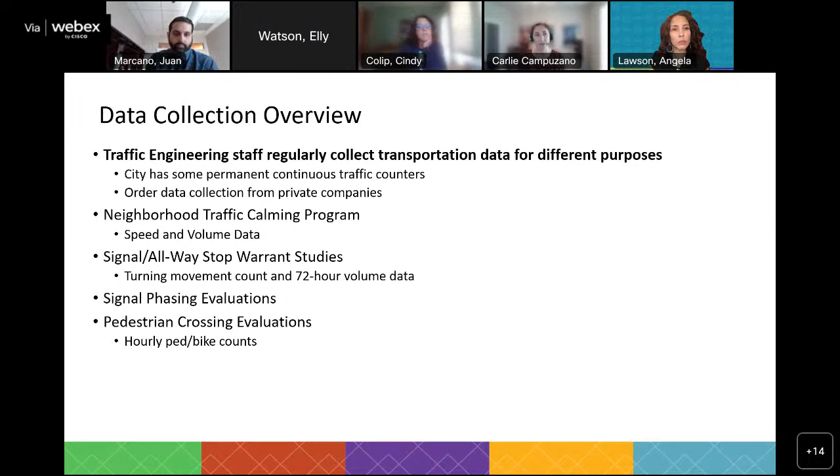And then we also collect pedestrian and bicycle data if we're evaluating a crossing or seeing if a crossing would meet criteria for a different type of treatment or enhancement. So that's just an overview of the different types of data. But again, I'll be focusing in on the speed data, which a lot of that we collect for the traffic calming program. So getting into traffic calming data collection, there are a couple different methods that we can use for data collection.

Our most frequently used method for collecting speed data in the city are tube counters. So you've probably seen these tubes around the city when we're collecting this type of data. These are pneumatic tubes. There are normally 2 tubes stretched across the roadway, and then there's a little box counter on the side of the road that actually collects the data as cars drive over the tubes. It collects the data, and the firm comes, takes it back, and processes the data. So this collects volume data, so the number of vehicles. It collects classification, so the type of vehicles and different truck categories, and then speed data as well. So it collects all these different types of data.

We normally leave them out there for 72-hour time periods, so 3 days, normally during the week. Sometimes we'll leave them out there for a full week or a weekend or something different, depending on the nature of the request. So this is the type of data that we collect most frequently for the traffic calming program, and it is an industry standard data collection method. So a lot of different agencies use these tubes. You might see these in other jurisdictions as well. Another type of data collection for speed data that's used throughout the industry is radar data collection.

So our radar speed signs that we permanently install do collect speed data, and we can go to the field and download that data if we're doing follow-up studies or if we've received a different request or something like that. So those are collecting data.

And then APD has radar signs as well. They have mobile radar trailer units that they use. And so they normally, I think each PAR area has one, is my understanding, and then they will leave it on maybe one direction for 1 week and then another direction the other week.

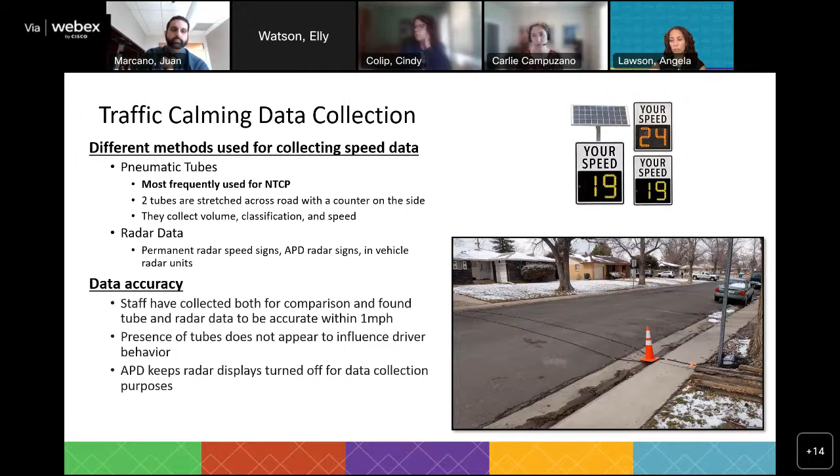So next, I just wanted to get into a little bit of how we evaluate this data and what the 85th percentile speed means. I know that all of you have heard me say 85th percentile speed and probably other traffic engineers too, just when we're talking about if criteria is met for different devices or if a speeding issue is identified on a certain road.

So just as a basic definition, 85th percentile speed is the speed at which 85% of vehicles are traveling at or under. So this represents the speed that most people are going at or under. And if you are looking at a bell curve, so speed data is generally distributed similar to a bell curve, the 85th percentile represents about 1 standard deviation above the average.

And this is getting really kind of specific math-based, so I'll try to take it to the higher level, but it's really the speed that most people are comfortable going. And most people are comfortable going a reasonable speed based on the design and characteristics of the road. So that's part of the reason why we use this metric.

Also, just from a safety standpoint, what we're really looking for is uniformity of speeds. We want people to be going about the same speed as each other, which promotes safer travel. So for example, if you're driving on the freeway, if somebody's going 20, that's not safe because we want everybody to be going around the same speed as each other. It helps for lane changing, to kind of anticipate what other people are doing.

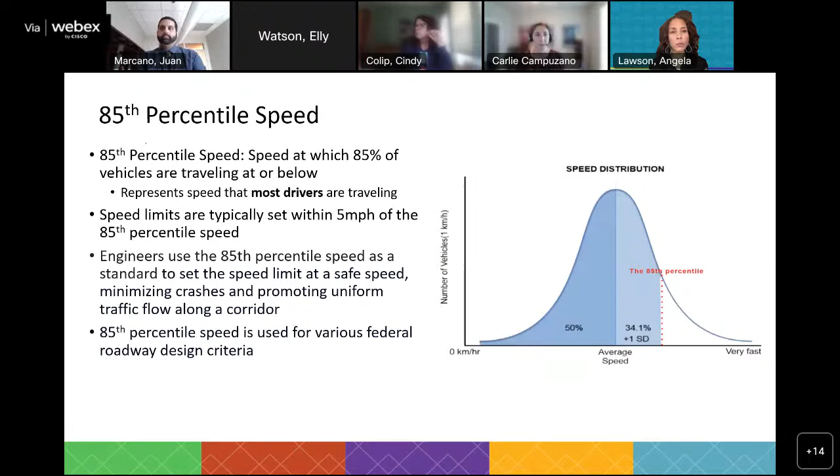So 85th percentile is not only used for these types of evaluations of speed data, but it's used for all sorts of engineering roadway design criteria. It's cited in a lot of different federal manuals as kind of what we try to design to is the 85th percentile speed. And speed limits are typically set within 5 miles an hour of that speed as well.

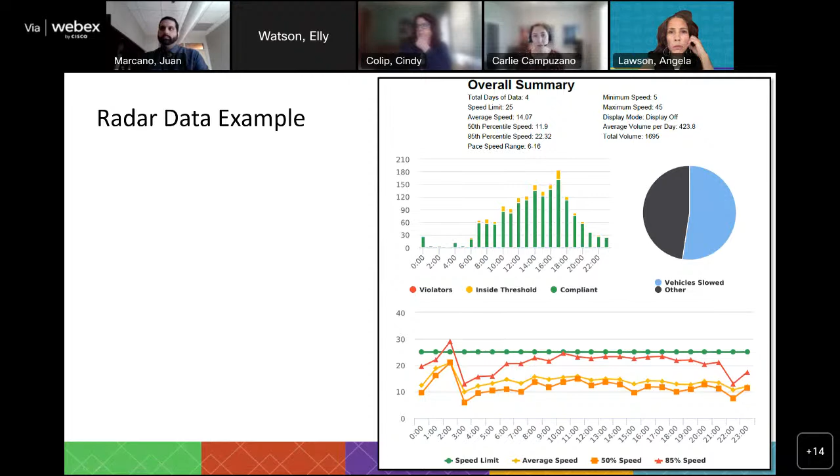This is just an example of what APD's radar data output typically looks like that we're able to download from their databases. So you can kind of see on this chart that it's shaped a little bit like a bell curve. So you can kind of see that there's a speed that a lot of people are comfortable going, and then there's always some outliers above and below that. So that's just an overview of how we collect the data and what the data looks like.

And next, I want to get into a little bit about how we use that in terms of our traffic calming program. I know that's something that you all get asked a lot from members of the public, as do we. So definitely good to go over this. So with our traffic calming program, local and collector roads are eligible for the program. So these are generally roads that have one lane in each direction, and are in more residential areas in general is where we get these types of applications.

So first we always collect data, I should say, going to the beginning. If we receive an application, we send an email to the applicant or a phone call and let them know that we've received it, and we give them general timelines of what to expect and how the process works. Then what we do next is we set up data collection. Sometimes we set it up right away. Sometimes we'll wait if it's a school-related concern and school's not in session, or weather issues in the winter or something like that.

And then when we get the data back, the first thing we look at is what are the speeds? What's the 85th percentile speed? What does the distribution of speeds look like? And how does that compare to the posted speed limit and the characteristics of the road? So generally, if speeds are about 5 miles an hour over the posted speed limit for the 85th percentile speed, they move further in the process where we continue to evaluate.

So another criteria that we use is based on traffic volume. And a traffic volume threshold we normally use is it needs to be at least 500 vehicles per day or more. Because if it's under that, it really means that it's just the very local traffic only, and it's maybe the smaller number of houses that are directly adjacent, and it's not necessarily what we would consider any cut through traffic or outside traffic, and it's relatively low volume.

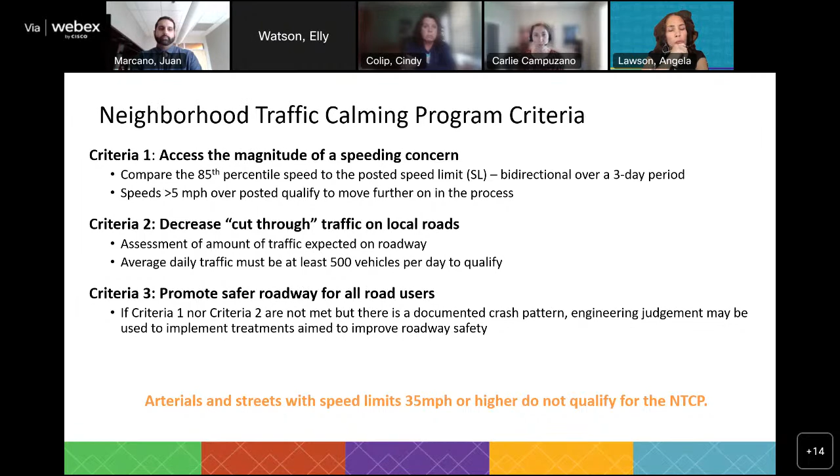So if they've met those first two criteria, we go through a prioritization process each year with the traffic calming program. We've been getting pretty consistently 30 to 40 applications per year to the traffic calming program. It's been very consistent since the program started in 2019. It's been actually a little busier this year, I think. And so if the roadway qualifies, we look at a lot of different criteria to see where it falls on our overall list, and then to see what funding we have for the year.

So what that looks like, there's a lot of different criteria. We're all engineers. We make a lot of spreadsheets that we've fine-tuned over time for this. But what we look at is first vulnerable populations. Is it near a school? Are there those kinds of features? Is it an elementary school or a lot of kids walking there? Then we look at location and proximity to pedestrian crossings. Is the roadway on the regional high injury network, which on local and collectors it's generally not, but that is something that we do look at.

We look at what we would do as a mitigation and what is the cost. So on some of our longer collector roads, it might be a more expensive mitigation, and that factors into it because we don't want to use the whole year's funding on one project. What I don't have listed on here, but we do look at what the actual speeds are. So if it's 5 miles an hour over the posted, that's not as severe a speeding issue as if it was 7 or 10 or sometimes higher. So that also factors in.

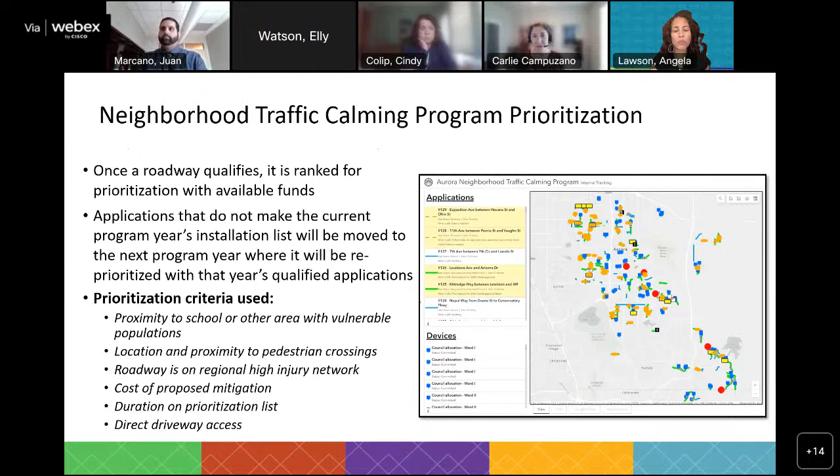So that's just a basic overview, and this is just a screenshot of our applications and mitigation citywide, which is becoming a pretty crowded map. But like I said, Carl went over that more specifically in a previous meeting, so I won't dive into that too much. So that's just the overview, and with that, I'm happy to answer any questions.

Thank you so much, Carlie, for that presentation. I have a bunch of questions, but first I'm going to recognize my colleagues. So Councilmember Lawson, do you have any questions or comments?

Yes, so Carlie, thank you for providing the slide on Tufts. Just a couple of questions on that, using that as an example for some of the citywide ways that we're looking at speed data. So we've had the radar cameras up there that tell how fast you're going. In the data that you provided, it looks like people are only going 5 miles over or 6 miles over on that road.

Generally, so that's the 85th percentile speed. So most people are going within that. But what you can maybe not see in an entire 3-day period, because I made this really tiny, I'll read it to you. So we have speed ranges that are 5 mile an hour increments in this. And so there are always a few outliers.

And so on Tufts, over a 3-day period, when this was collected, there were 2 people who were going 50. So that is always going to happen on every road. There are always going to be 5% or so, or a little more, of people that just disregard the laws and are out of compliance. They know they're going too fast. There's all different factors involved in that, but those aren't necessarily the people we want to design to, because they don't really obey anything that we put on the road. Chicanes, roundabouts, it's not going to influence these 2 people in a 3-day period, if that makes sense.

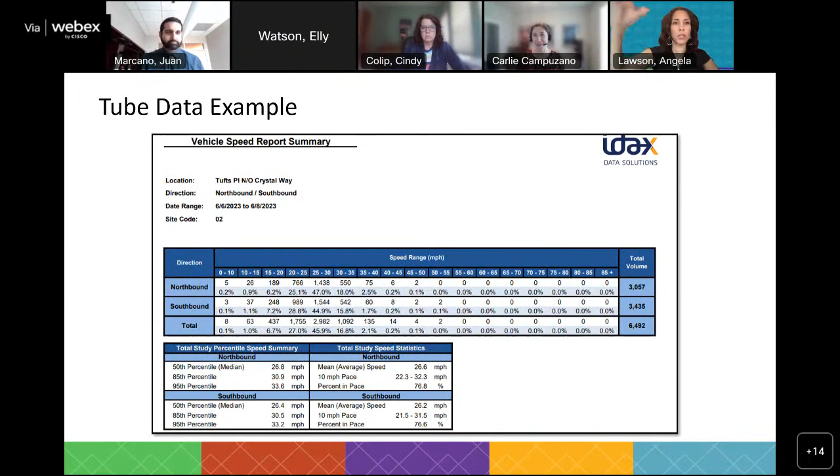So. Okay, well, thank you so much. I think that answered my question. Sorry, it was for my particular area, but I think it addressed questions that would be citywide as well. So thank you for addressing those and taking the data from Tufts as an example. I appreciate it. Yeah, no problem. All right, thank you, Councilmember Lawson.

Councilmember Medina? Yes, a couple questions. Do you take historical data on certain areas? Have you done that with the entire city to see if there have been trends of certain residential areas or places where there seems to be more speed at any particular time than there used to be in the past? Do you guys collect that kind of data?

We've been collecting speed data through this program. So we have a lot of data from 2019 and after as far as speed data on local and collector roads. We have done some data recollections and some areas do change. Some of them we see change if there's high impact work zones and maybe there's a little bit more traffic diversion. The pandemic just made things a lot different in a lot of different areas.

But honestly, from a lot of the data that we've recollected pre-pandemic and post-pandemic, the speeds on local streets have not changed that much, I would say. I think what did change in the pandemic was a lot of people were maybe spending time outside and walking more in their neighborhood during the day, and were just home working from home to notice the speeding concerns, is what I saw.

There are a lot of different traffic pattern changes that have happened over the last few years. But as far as speed data, I feel like it's been relatively consistent, but we don't have a really solid database on local roads before this program, just because we didn't have a program available. But APD has had radar sign data available for a really long time, so we do look at their data when we get a new request, and sometimes they'll have data from 5 or 10 years ago, and I haven't seen anything significantly different, but it's probably street by street, honestly.

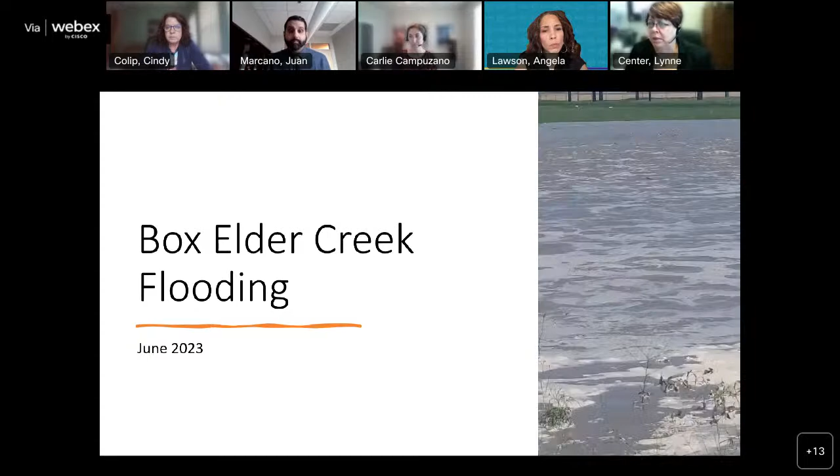Good afternoon, everyone. My name is Lynne Center. I'm the Deputy Director of Public Works in charge of operations. I'm just going to take a few minutes to talk to you about some flooding we had on the Box Elder Creek that did some pretty decent damage to some of our roads out there. So the video is showing some of the water flow that was happening out there. Just to give you an idea of where we are in space, so to speak.

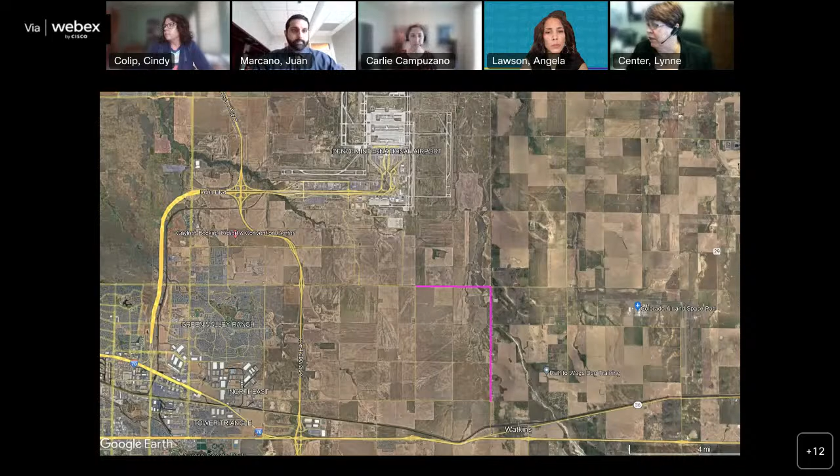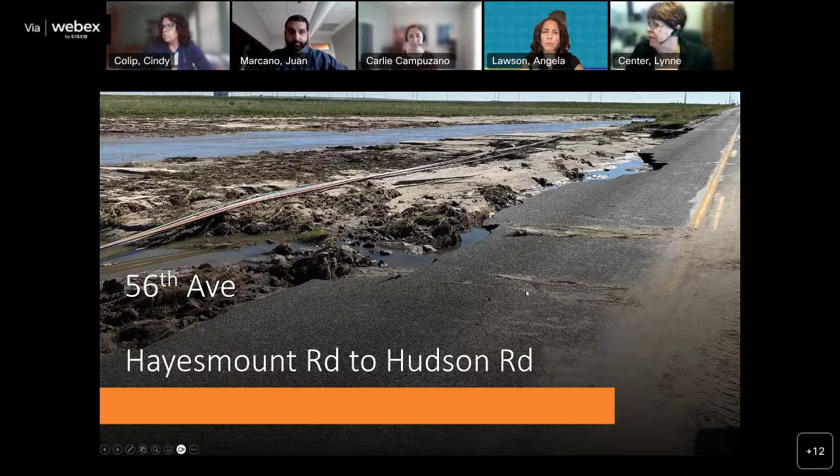We're talking about 56th Avenue between Hudson Road and Hayesmount Road, and Hudson Road between 26th Avenue and 56th Avenue. So that's just southeast of the Denver International Airport and just north of I-70, east of 470. So just to give you an idea, some pictures. I'm going to start showing you some damage that happened on 56th Avenue. Most of the erosion that you're going to see is about 4 feet deep here on 56. And this is actually the better of the two.

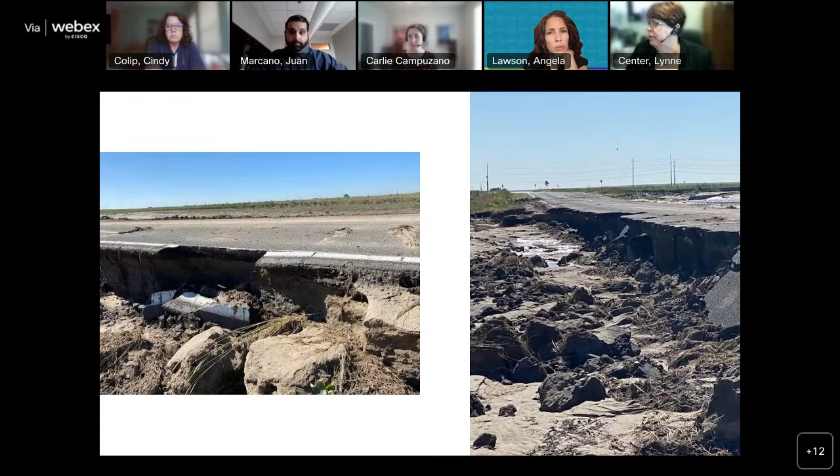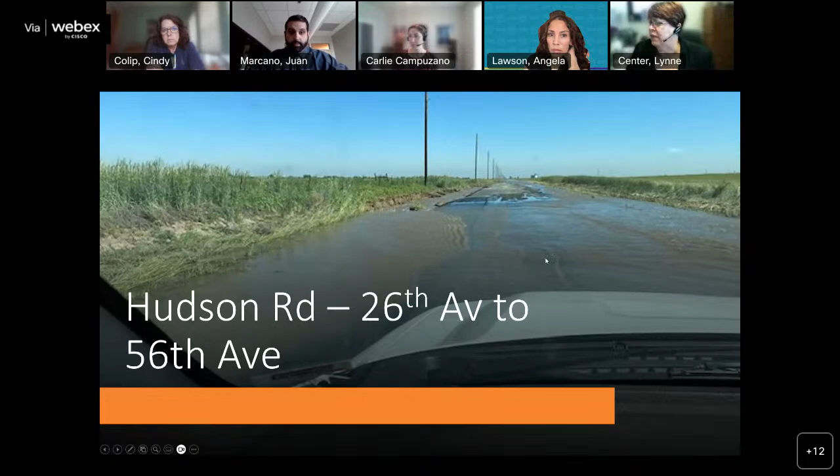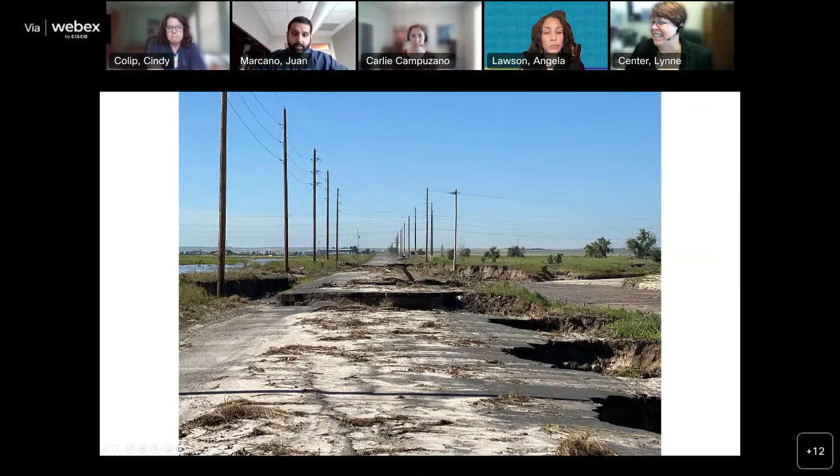Wow. And then this is Hudson Road. And this is what it looked like when it was flooded. And I have another picture here when it was flooded. And then when the waters receded, this is what we had left. Again, we're looking at 4 feet of scour and destruction of roadway here. That looks bombed out. Wow. Yeah. A couple more pictures on Hudson Road.

So as you might imagine, we have closed these roads to traffic. 56 is closed from Hayesmount to Hudson, and Hudson Road is closed from 26th to 56th Avenue. We expect those closures to be in place for at least the next 12 months, maybe longer. As far as recovery, we are still doing some damage assessment, but it looks preliminarily like obviously we're going to have to do some full-on roadway reconstruction out there.

Right now, our estimates are looking at just under 6,000 square yards of pavement, and that's just pavement. We are working on estimates. We expect the totals to be in excess of $10 million to include drainage improvements and hardening, if you will, the roadway against future flooding, which brings us to the PROTECT grant.

The Federal Highway Administration has a PROTECT grant where it is, I believe, a 75-25% match, where they will fund improvements above and beyond to prevent whatever disaster it was from happening again, in this case a flood. So we are pursuing that grant. We've decided to apply. We hope it's okay. The deadline is August 18th, and we literally found out about it about 2 weeks ago. So we didn't really have time to pull together a full-on presentation for you all. But we hope that you would support us moving forward in applying for that grant.

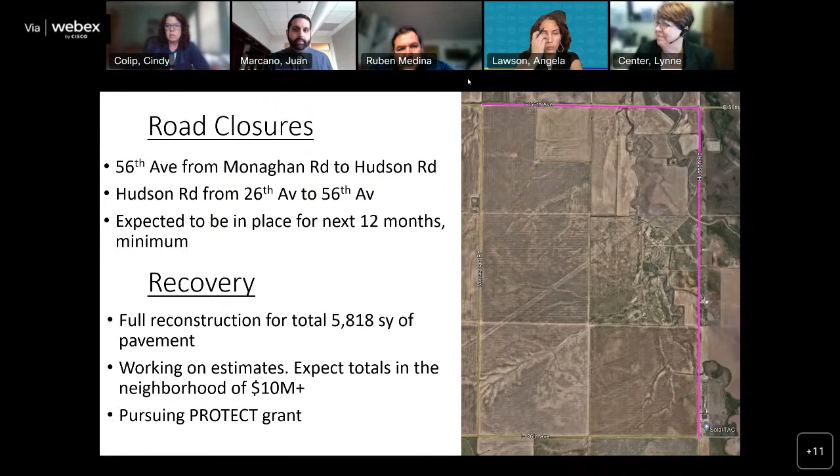Yes, just real quick. I wanted to let everybody know that this is Steve Durian's last TAPS meeting with us. He has accepted a position in Boulder County as their Public Works Director. So certainly have enjoyed having him here. He's helped us make a lot of improvements around the development review side of the house here in Public Works with the reorganization and getting our metrics up to speed. So I wanted to let the committee know and also just publicly thank Steve for everything that he's done.

Thank you, Stephen. Congratulations. Thank you. I want to just thank Cindy and all of her staff for bringing me on board and all the support for the last several months. Thank you. All right. Thanks again.

And all right, with that, what are our anticipated topics for our next meeting? All right, thanks, Chair Marcano. We actually have 2 for August coming up. We have Carly coming back since she did such a great job today. She's going to do the DRCOG Regional Traffic Operators Grant Application Update. So she'll give a brief summary of the applications we put in there for which grants and which projects.

Lynne's going to do a presentation on snow removal by HOA and special districts. I know it's not snowing right now, and doesn't feel like it will be anytime soon, but winter's coming. So we'll talk about snow removal by HOAs next month as well. And then just real quick on some of the items looking ahead for September. A few of these items we were just talking about during Carly's presentation. So striping bike lanes with overlay projects. That's an item that we'll discuss coming up in September.